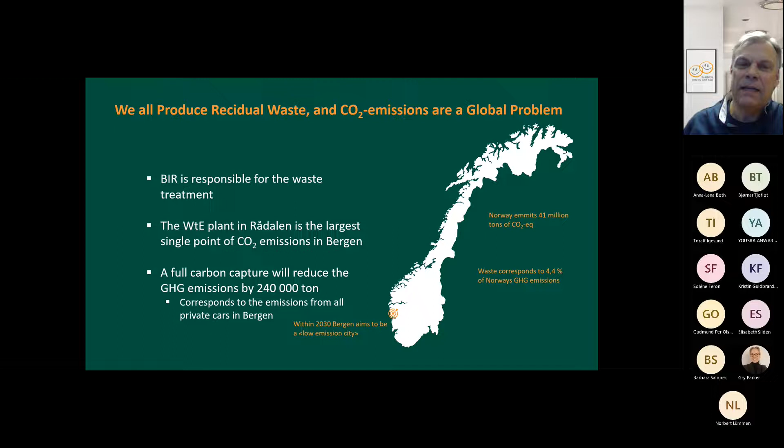If we look globally at waste, this is a survey from the World Bank Group called 'What a Waste,' and they say that 19% of all waste in the world is recycled. That means we put metal back to metal, using metal again, we compost food, and we reuse building materials and so on.

11% is incinerated, which also includes waste to energy. 12% is landfilled, meaning landfills that are strictly regulated — what we call sanitized landfills, where they control the water from the landfill and what is put into them. Actually, in the world, 58% of waste is put into landfill, dumped, uncontrolled, and then also ends up in the oceans and so on.

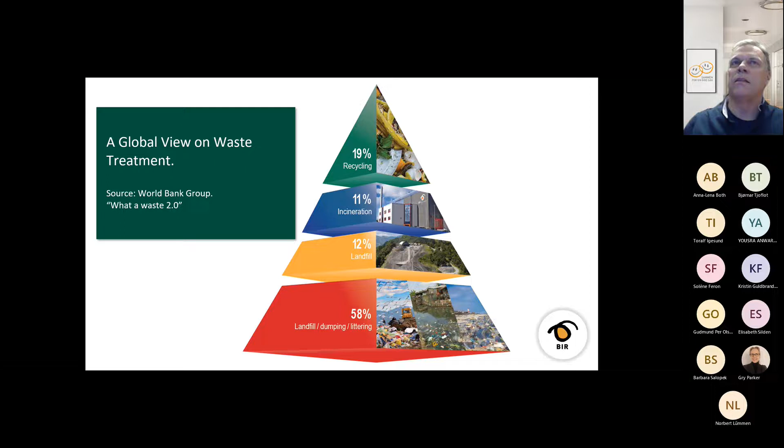To put this into perspective, in Europe we say we are the best continent in the world at waste handling. Looking at this survey from CEWEP, the Confederation of European Waste-to-Energy Plants, in Europe, if you look at the column to the left, 50% of all waste in Europe is recycled. Around a quarter is recovered from waste-to-energy plants, and a quarter is put into landfills.

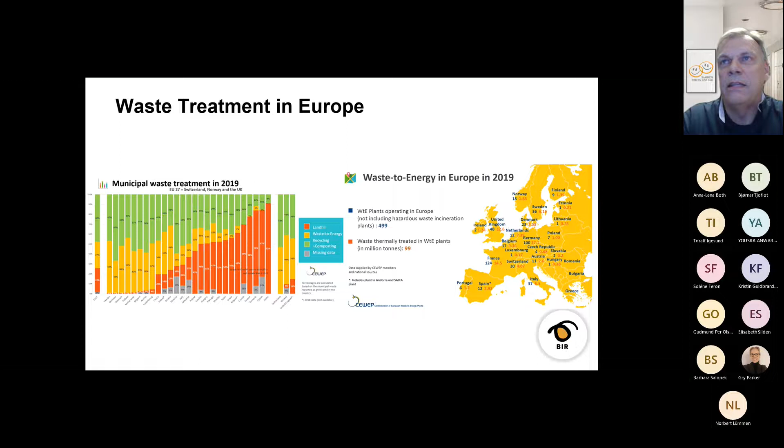So also in Europe, looking at waste-to-energy plants, in total around 100 million tons are treated and energy recovered. In Europe we have around 500 waste-to-energy plants, and on the map you can see how this breaks down for each country. Norway has 18 plants, treating 1.6 million tons.

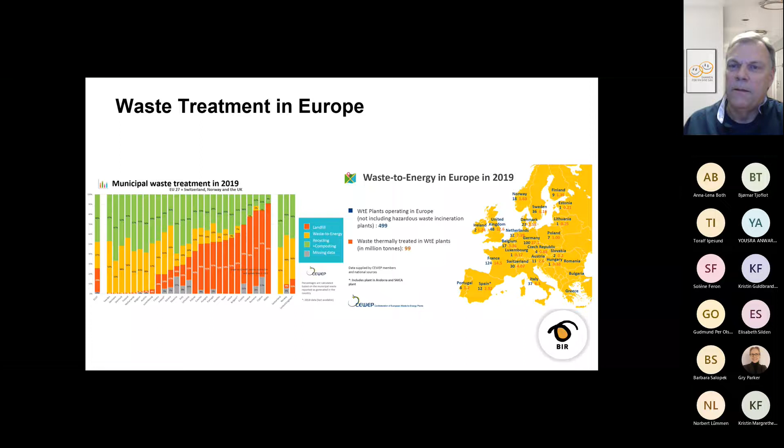Before we start with how we can contribute with negative emissions, it's important to see that the residual waste - what's left after we take out what we can use for other things like mixed materials - is also a mixture of biogenic CO2 and fossil CO2. We get biogenic CO2 from plants, from food, and so on, and we get fossil CO2 from a lot of packaging material, a lot of plastic, and so on.

The waste is sorted at your house, and the residual waste that you put in the dustbin is collected by BIR, and when we incinerate it, we recover both heat and produce electricity. If we can capture the CO2 emissions, we see that if we capture 40% of it, we have captured all the fossil CO2. So if we can capture more than that, more than the biogenic CO2, we can actually be carbon negative, or climate positive - or whatever word we should use for this.

CEWEP also looked into how the emissions come from waste. We say that 1 ton of waste produces 1 ton of CO2. And as I said earlier, 1 ton of CO2 is 400 kilos of fossil CO2 and 600 kilos of biogenic CO2.

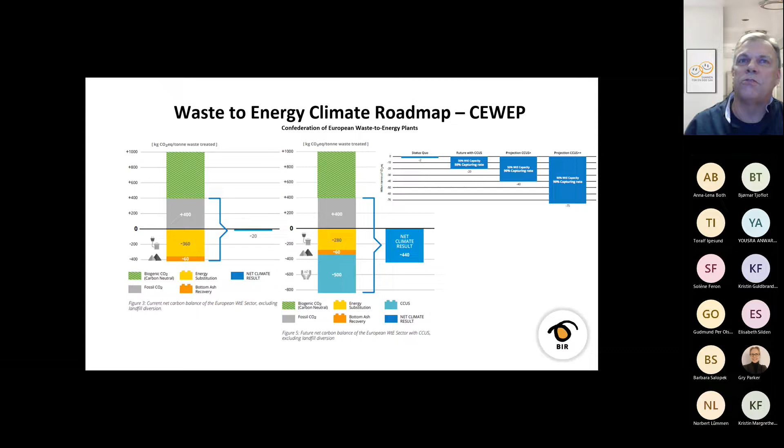And this is the basis for, and the importance of, why Bergen has such a high focus, and why BIR should also work on carbon capture.

We started a feasibility study in the fourth quarter of 2021 and finished it in the first quarter of 2022, together with Aker Carbon Capture and also Norsk Energi - companies we've had a close cooperation with for a long time. We wanted a study based on capturing the emissions in a capture plant, also how much it would cost in energy for liquefaction and transportation, and also delivery to Northern Lights.

This study, together with Aker, concluded that it's technically possible to establish a CO2 facility. It will, of course, need a lot of energy, but one modular plant - that was the target for this project - is possible. We also said that we need some stretch to be able to capture 90% of the CO2, so we need to see how much space we need for this.

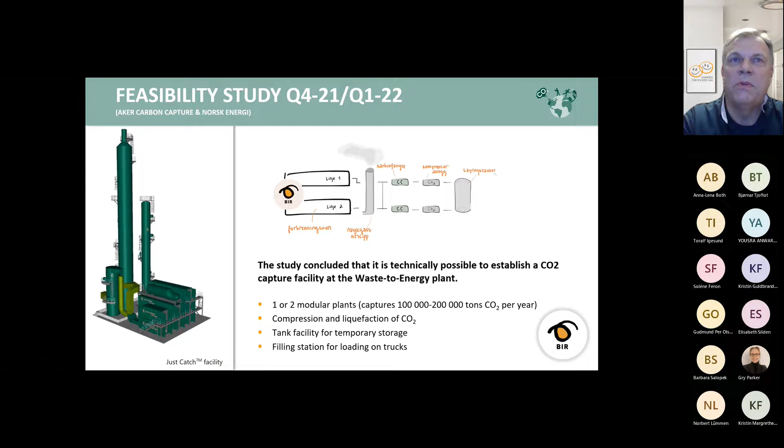One issue with this - as I said earlier from the CEWEP, the waste-to-energy plant contributes positively by producing energy. So if we use all the energy we are producing to capture the CO2, then we think that's not contributing positively globally.

In Bergen, we are currently producing 60 megawatts maximum to the district heating, and yearly 300 gigawatt hours are supplied to the district heating network. For electricity, we can maximum produce 15 megawatts, and yearly we are producing 100 gigawatt hours of electricity. We're not able to do both at the same time, but these are the maximum numbers. So how should we integrate this in a way that we are not using all our energy for the capture?

We have worked very closely with Norsk Energi on this, and we have made many scenarios on how we can use heat exchangers to make sure that all the electricity we are putting into the carbon capture plant can be recovered as heat into the district heating. That means we can increase the delivery of heat to district heating to over 70 megawatts. But in the summertime, it's not possible for us to recover all the energy that we are putting into this capture.

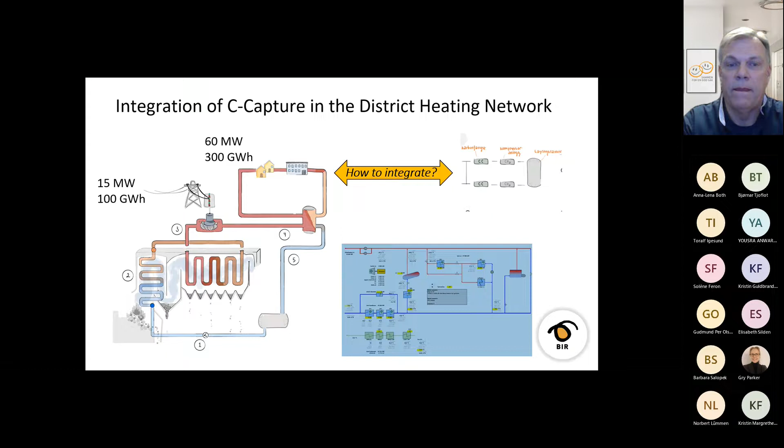Based on the feasibility study, we had a pre-study in the second and third quarter this year, and delivered it in September. That was a project done together with COWI and Scitech, the same consultancy that worked closely with the Oslo plant now starting to build their carbon capture plant. This is based on one modular plant from Aker Carbon Capture, but we are saying this should also be possible for other suppliers of capture to deliver to us.

We worked very hard to find the best location for the capture plant, including the compression and liquefaction of the CO2, and also transporting it and the filling stations for transport to Øygarden. Again, we looked into the heat integration between the capture plant, the waste-to-energy plant, and district heating.

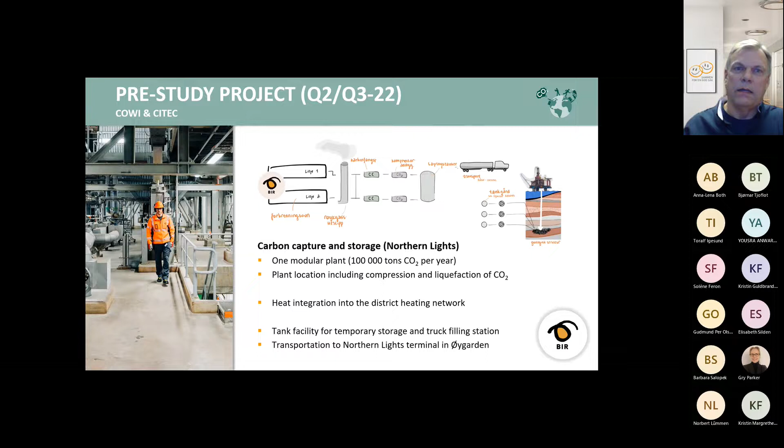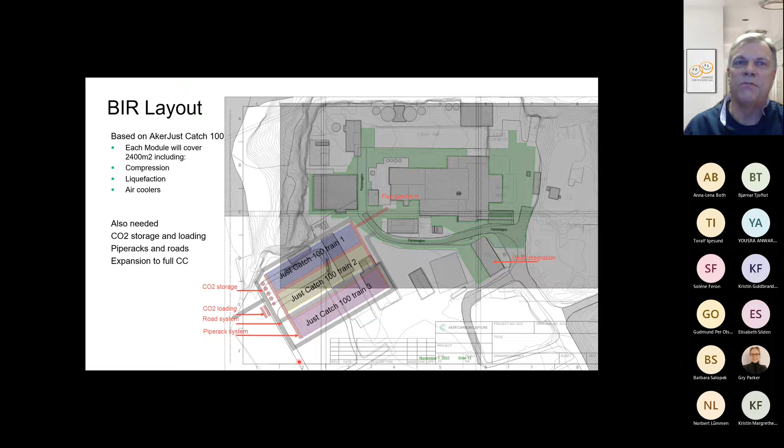This is a schematic just to show. You see here, if you see my pointer, this is the waste-to-energy plant: this is the bunker, this is the incineration, and this is the flue gas treatment, the chimney, and this is the district heating central. So we need to place the capture plant. This is for one just-catch plant from Aker. You see it's quite space-consuming if we should capture 90% or 95% of the emissions using this just-catch setup. We are saying this is the space we need, but it doesn't necessarily have to stay exactly here — just to give some indication on the size of the capture plant.

We also looked into the investments in this project. This is quite immature technology, or at least there isn't much experience delivering to waste energy plants. So there is high uncertainty on factors like shifting prices and how much we should do on the heat integration, but we are estimating around 1,000 million NOK, or 1 billion NOK, for a capture plant of 100,000 tons. We also looked into our operating costs, and we have some indications on that, including how much electricity we are using to run the capture plant.

We see some upsides, both from reduced carbon tax, and also we think it will be interesting for many suppliers and customers to us to reduce their greenhouse gas emissions, and also to pay for this capturing of the CO2.

In the placement of the new capture plant, we are working very closely with the regulatory authority in Bergen, the county of Bergen, on how we should place such a capture plant and where, what consequences that would have, and so on. We have put in some recommended locations and are discussing this with the county of Bergen, which also means we need to go into dialogue with our neighbors on how we should do this.

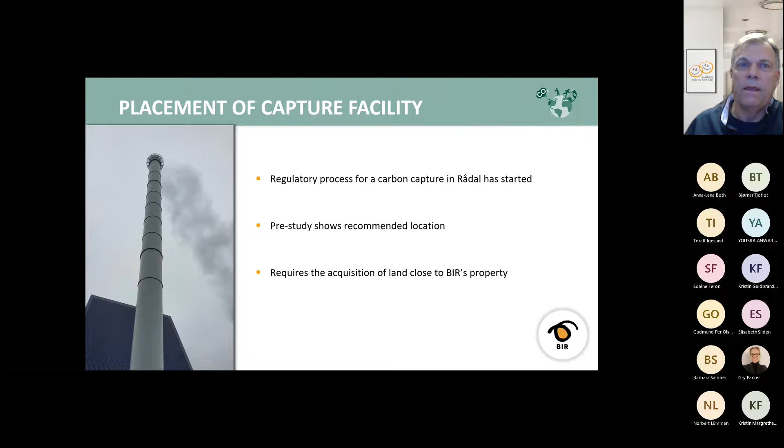We think that if we should achieve something as big as this, and in a good way, we need to work very closely with the other waste-to-energy plants in Norway — the energy plants in all the large cities: Oslo, Stavanger, Kristiansand, Trondheim, and also an industry network in Borg, with Fredrikstad and Sarpsborg. We are working closely together in a network called KAN, which is Norwegian for climate cure for the waste-to-energy sector in Norway.

We share information, we work on all we learn, we share. We are now making a benchmark waste energy plant so that we can use it to request information from the carbon capture suppliers and so on. We also need to work on business models, how to make sure we can finance such a large investment, and we need to speak with one voice towards the government on these issues.

Very shortly on BIR and carbon capture. As I said earlier, we started to orient ourselves in the carbon capture business in 2015-16. We had the startup of the first feasibility study in 2018, delivered in 2019. That was also a survey of the available technology from Norsk Energi. We also started a very interesting project with Bergen Carbon Solution that some of you may have heard of.

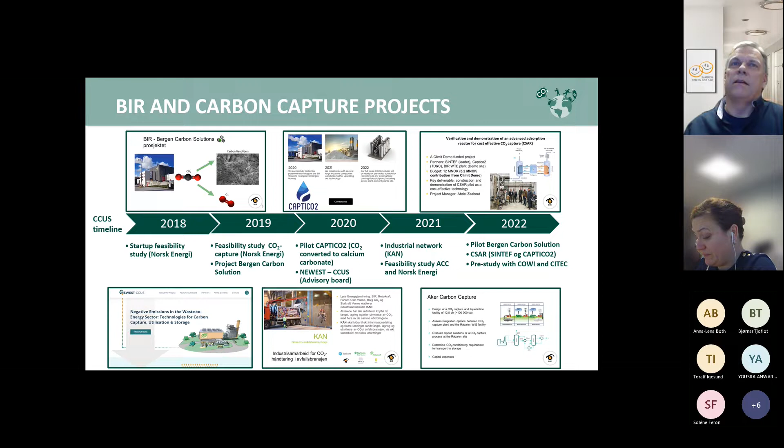A short status on where we are today. We have owners, as I said, and if they should reach their targets - Bergen City, to be a low emission city - they need to have capture at our plant. That's also making us very interesting for close cooperation with Bergen Kommune, Bergen municipality.

We are also thinking that we are interesting for Northern Lights because we are only 50 kilometers from Northern Lights, and we can develop this transport with trucks from us to Northern Lights. That makes them more interesting for other locations. We will continue this pilot testing that we have started, and also continue the studies on how the technology is developing and how the costs are developing for carbon capture.

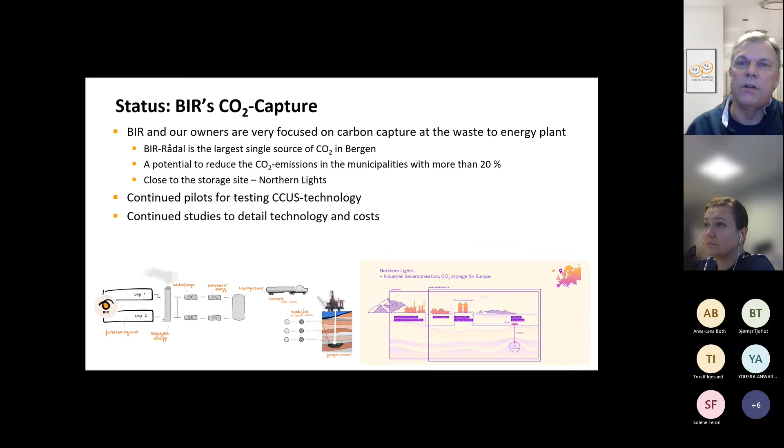We think the way forward for us is, of course, to continue trying to secure support for the project that we have in the capture plant. We need to have dialogue with both local authorities and national authorities, and we get a lot of help from this KAN network that we have together. We need to continue discussions with Northern Lights to secure that they will also receive liquid CO2 by trucks, and to try to bring more attention to these projects.

I also mentioned that we need somewhere to place the plant, so we need to acquire the needed space for it. We will need to continue to choose the best carbon capture technology for BIR, our company, and also for Bergen. And what I feel is the most interesting part is also to continue to help local startups working on carbon capture projects, and to work closely with them, and also with universities and research environments, to try to find the best possible way to do carbon capture in BIR.